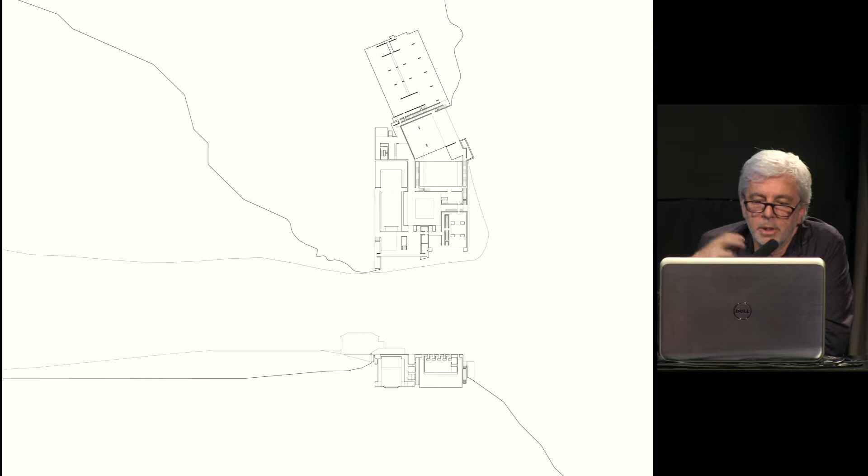Here you can see our program, an art center which was built on the island. We had a number of challenges. We had to create an auditorium, and despite the limits of the territory, we had to create volumes big enough for the visitors.

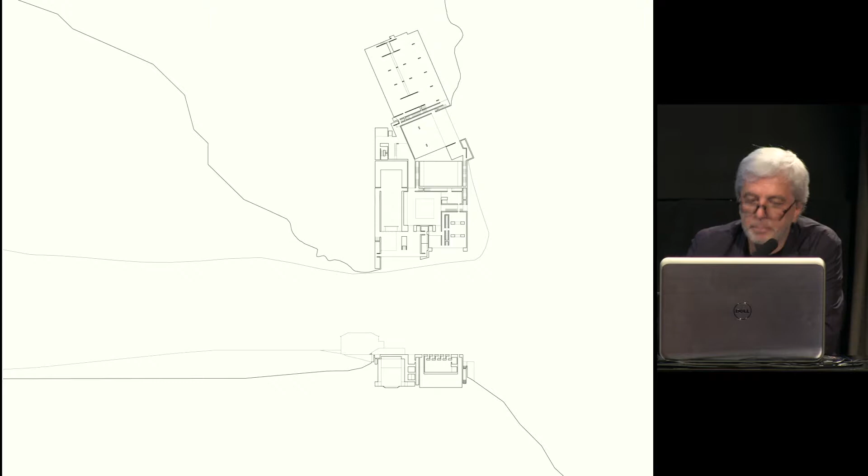We had to welcome the population and meet their expectations, and also take into account the number of visitors that might come. So we had to make calculations, just like when you calculate the number of people that can get into a plane, we had to calculate the possible number of visitors.

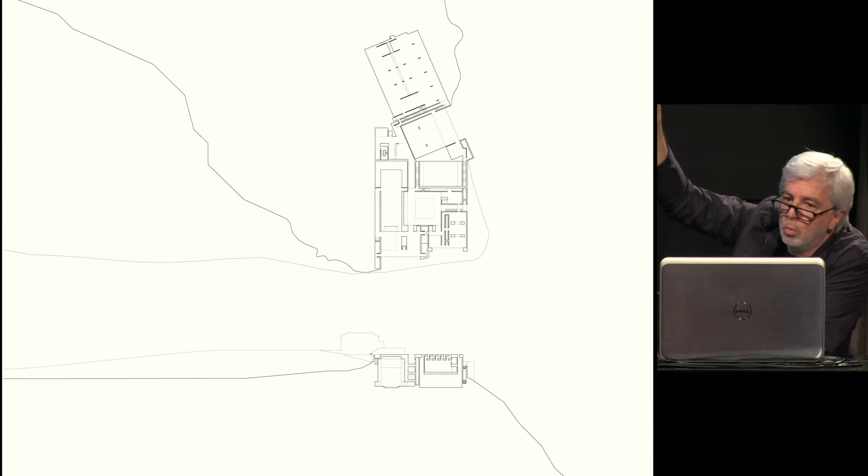Then we had to create openings, measured the depth, and erected our building. So it's like a promenade in a way, with a central patio that distributes the different rooms.

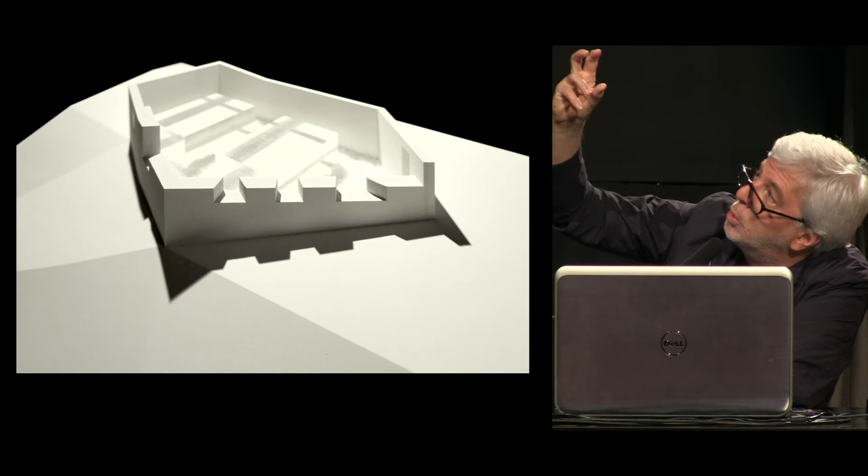Because the structure has to defend against an attack coming from the ocean and from the ocean only. The idea is timelessness. If I sit in my living room and I go to sleep, I have to see the ocean, I have to see the violence of the ocean, and I'm confronted with the harsh weather conditions. I have no other choice. I have to see them.

So this is the model for the project. We have the specific sleeping area, and we have what happens within that ruin structure with the volcanic ash.

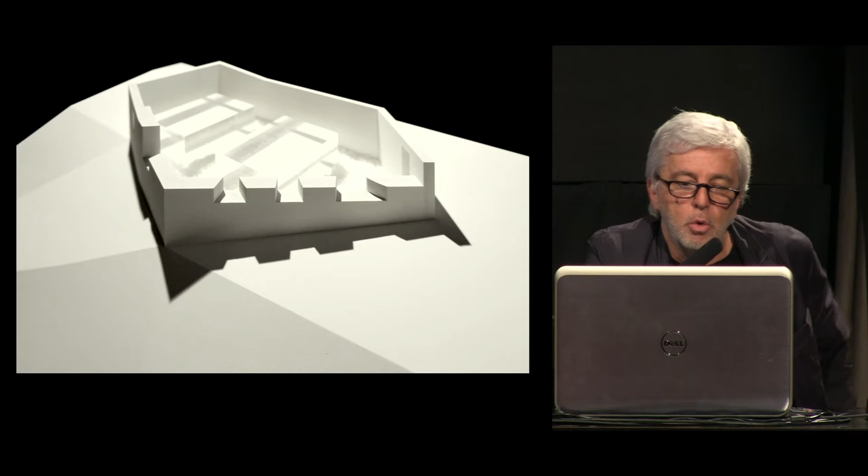We introduce what we call a melody when we build houses, buildings. Choreography is of the essence. The bodies within, that's what we're looking for. We're looking for a choreography of the bodies that will move within that structure. The more I understand this choreography, the better built my object will be. And this kind of choreography can create some kind of unforeseeability in the dancing of this volcanic ash.

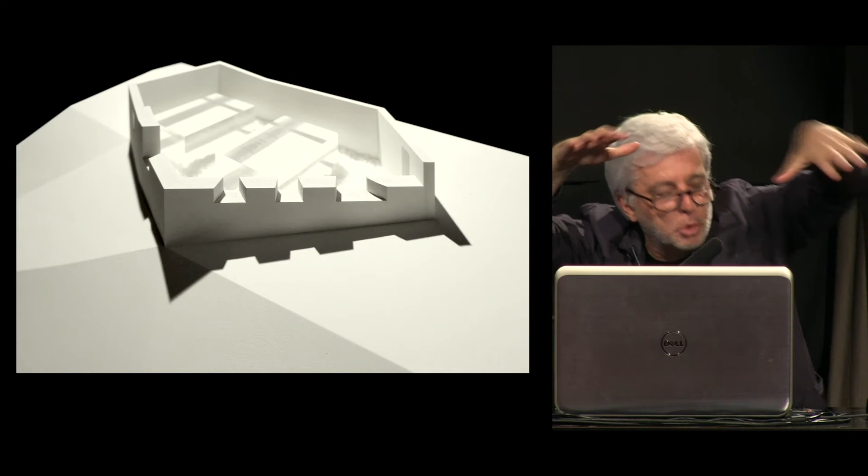And then we have this big roof, which encapsulates the bodies that are moving. And this again creates this resonance box. There's a sort of competition being played out between the sound of the person walking, laying their feet on this volcanic ash, and the sound coming from the ocean, echoing.

So we want to encircle all of these elements in the outer limits. We don't want to redesign a contemporary fortress. We keep what already exists. We keep this initial idea, we keep the ruins, but at the same time we create these openings, these piercings in the facade. In other words, this is an idea of defending the island against different incoming attacks.